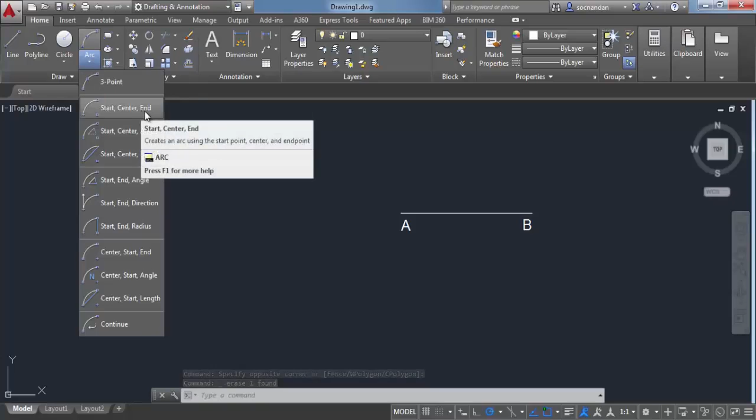Now next is start, center, end. Again, as the name suggests, you first need to click on the starting point, then center point, and then end point. Let's select this arc. Let's suppose that B is the starting point for the arc. Now the center point will be A, and now you can directly see that here we have this arc.

Right now the arc is created in anti-clockwise direction, and when you move to clockwise direction you won't see this arc. But if you want to create this arc in clockwise direction, then press the Ctrl key and hold it there, and now if you move in clockwise direction the arc will be created. But the default direction is anti-clockwise. Now you can also click anywhere in the screen or select an angle for making this arc. So I'm clicking here, and here we have this arc.

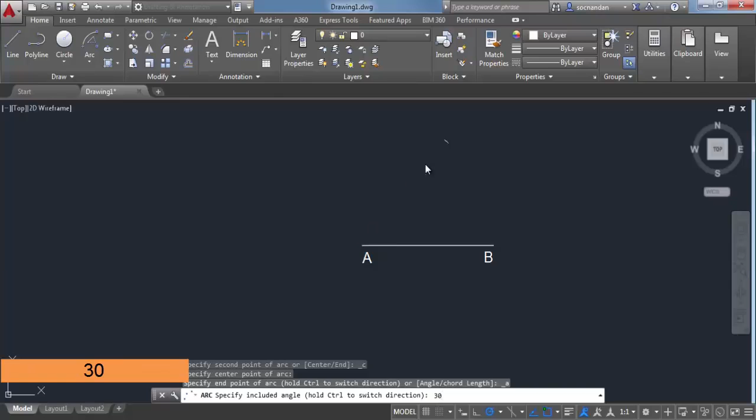Let's go to the next option, which is start, center, and angle. So here is the start point, which is point B again. A becomes the center point, and now we need to specify a particular angle, and this will be the included angle of the arc. So let's say that we want an included angle of 30 degrees. So type 30 on the command line and press enter. Now this arc has been made, and if you connect this center point with this end point and measure this included angle, it should be equal to 30 degrees. Let's erase these two geometries.

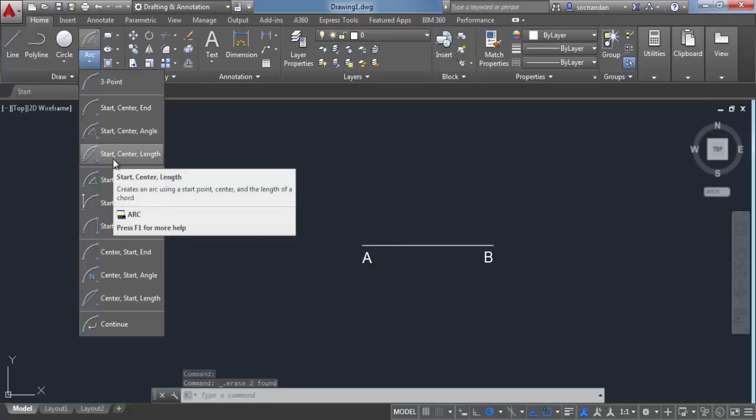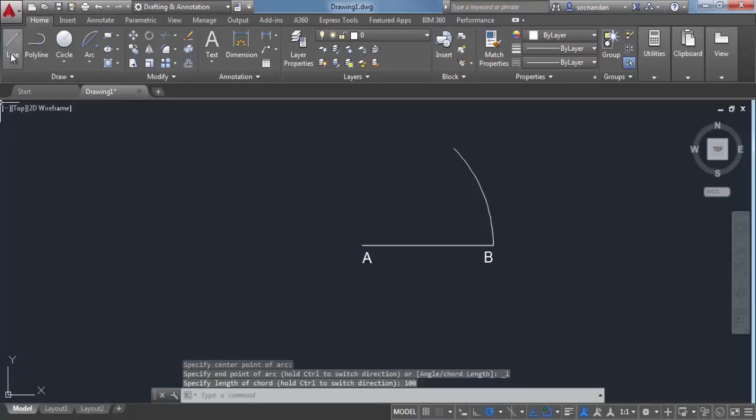Now the next arc is start, center, and length. For this arc, again you need to specify a starting point, a center point, and now the length of the chord which connects the two endpoints. So let's say that I want to make an arc with a chord length of 100 units. So type 100 and press enter. Now if you make a line which connects this point to this point, then the length of this line will be equal to 100 units. Let's get rid of these geometries.

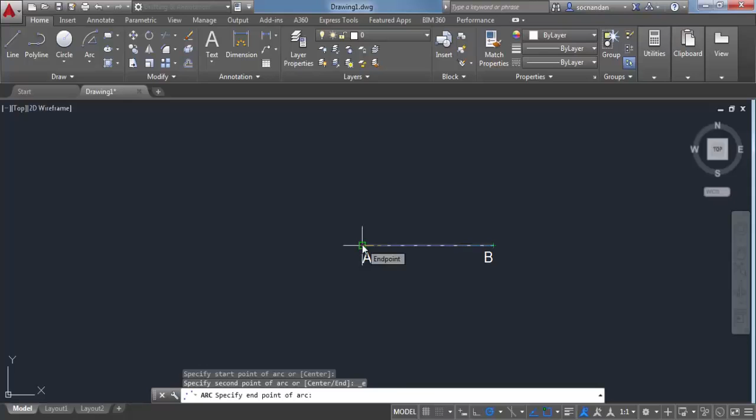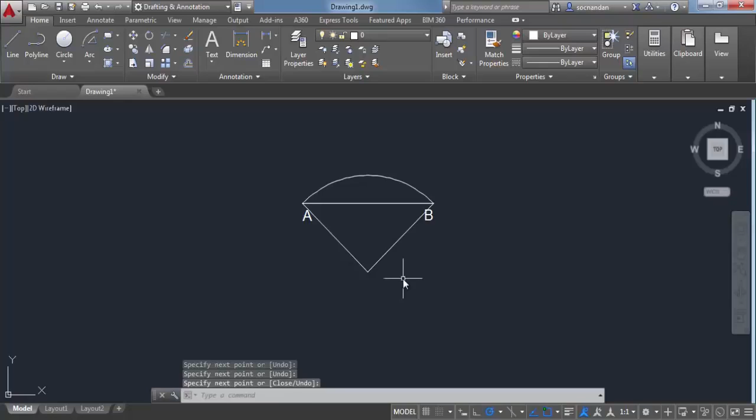Now let's move on to the next one, which is start, end, and angle. In this case you need to click on the start point of the arc, which is B, then the end point, not the center of the arc, and you can see that this arc will be restricted between these two endpoints. Now you need to enter the included angle of this arc. Let's say that I want an angle of 90 degrees, so type 90 and press enter. Now if you make lines which connect these two endpoints with the center, these two lines make an angle of 90 degrees, which is the included angle. So let's get rid of these geometries.

Now the next one is start, end, and direction. For making this arc, you need to select the starting point, then the end point, and now you can see that an arc is made with these two values, and your cursor will follow the tangent. All you need to do is specify a direction in terms of angle. If you want to reverse the direction of this arc, then press Ctrl and hold it, and now you can see that the arc will be made in the opposite direction.

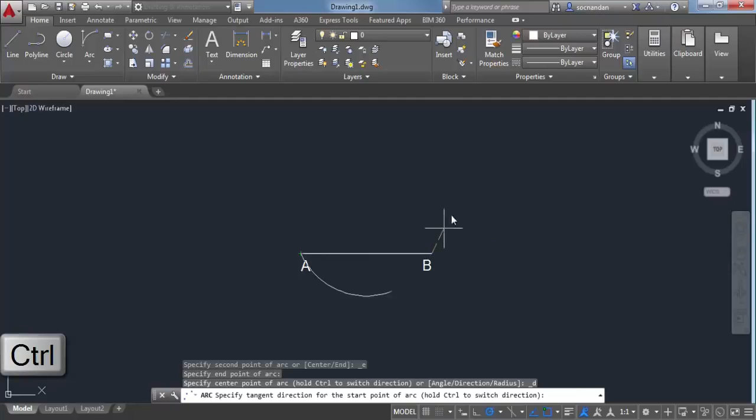Now let's specify an angle for this. So I'm specifying an angle of 60 degrees and press enter. So now here we have an arc made in such a way that if we draw a line that starts from this point, is tangent at this point and extends, then the angle made by this line with the positive direction of the x-axis will be equal to 60 degrees.

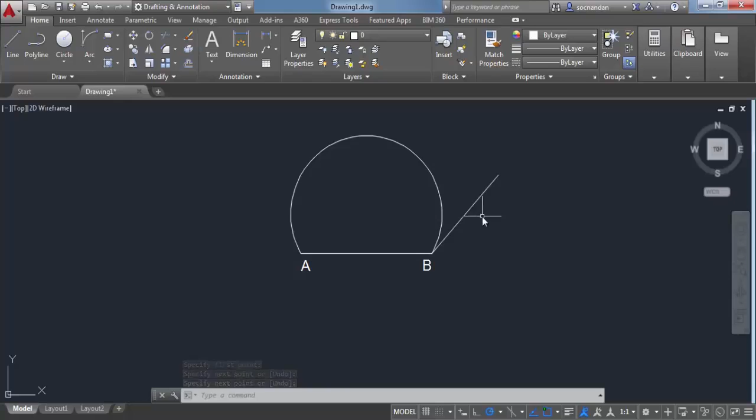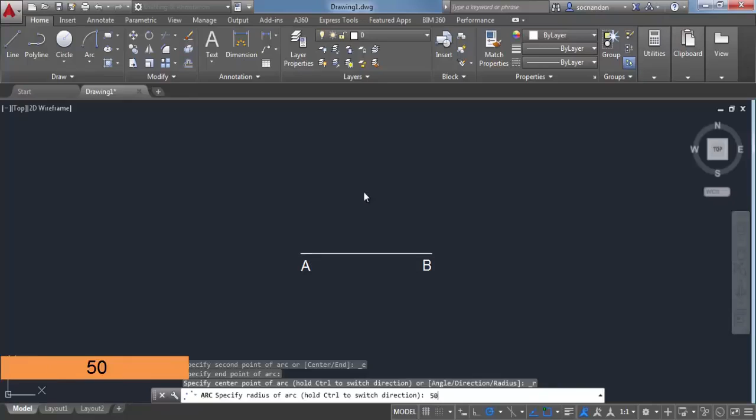Now let's select start, end, and radius. For this you need to specify the starting point of the arc, then the end point, and then the radius of this arc. Obviously you need to select a radius which can be given to this arc. If you select a radius which is too small or too large, then this arc will not be created. So I'm selecting a radius of 50 units and press enter, and you can directly see that this arc was invalid. AutoCAD was not able to make this arc.

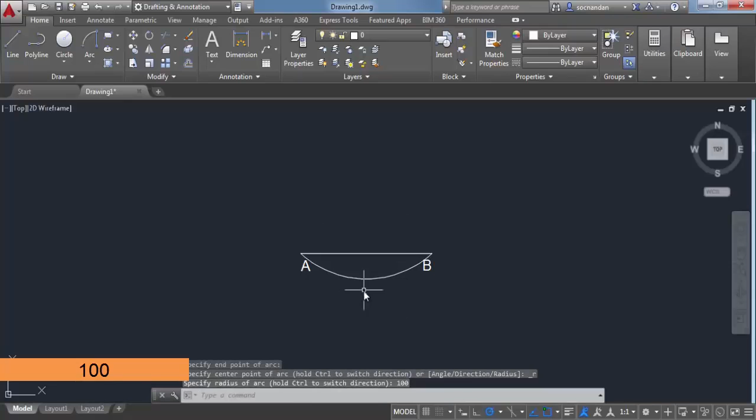Okay, so now I'll select this arc again and click on the starting point and end point, and in this case I'm going to enter a radius value of 100 units and press enter, and here we have our arc with starting point, end point and a radius of 100 units.

Okay, let's move on to the next one, which is center, start and end. For this you need to specify first the center point, then the starting point of the arc, and then your arc will be made in anti-clockwise direction. All you need to do now is specify the endpoint for this arc, and in this case also if you want to change its direction, you need to keep your Ctrl key pressed. So now here we have this arc.

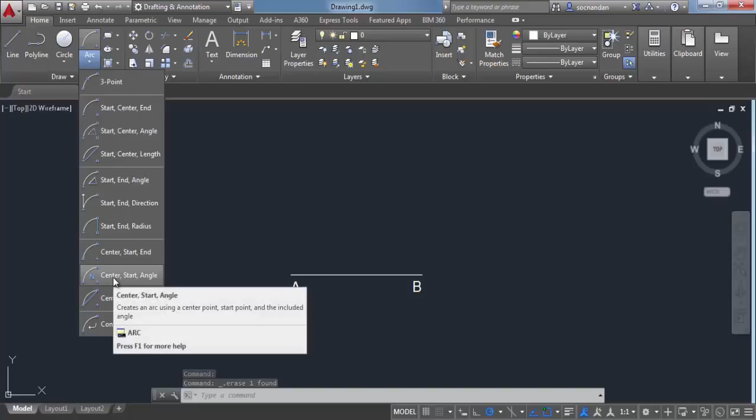For center, start and angle, you need to first select the center, then the starting point, and now the included angle of this arc. So it's similar to the one we have already discussed. So type 30 and an angle of 30 degrees will be created. So if you join the center with this end point, then the included angle will be equal to 30 degrees.

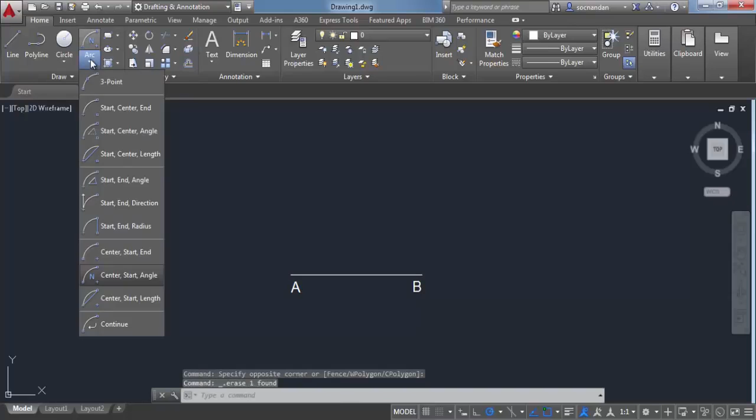Let's look at center, start and length. In this case, first click on the center, then the starting point, and now you need to specify the chord length. So here I am specifying a chord length of 120 units and press enter. Now if you connect these 2 points, then the length of this line will be equal to 120 units.

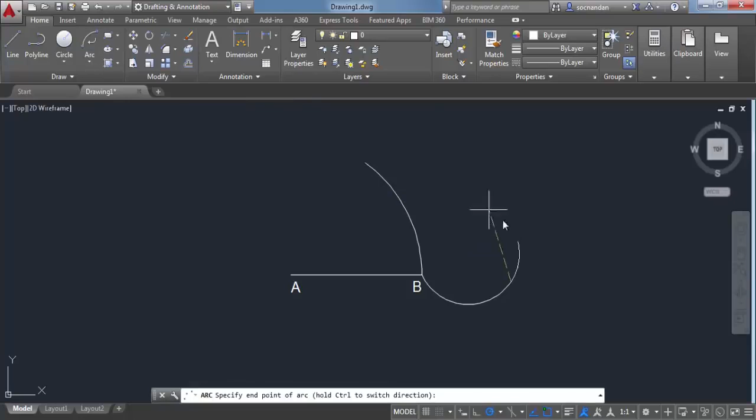Now let's look at this last one, which is continue. When you select continue, your arc will continue from the last drawn arc. Now you can see that this time this arc has been drawn. The next arc will continue from this point. So let's click on continue, and here our arc continues from the last drawn arc, and this continuity will keep on going.